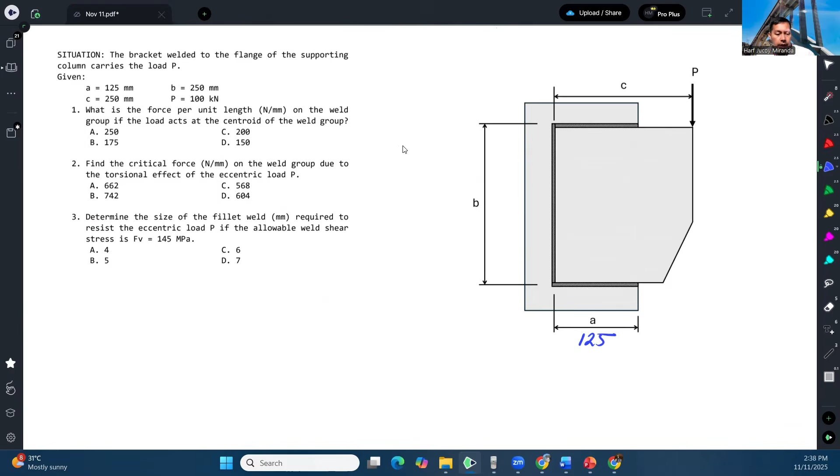We are given the following data. A is 125 mm. B is 250. C is also 250. And the applied P is 100 kilonewtons.

First question: what is the force per unit length on the weld group if the load acts at the centroid of the weld group? Second, find the critical force on the weld group due to the torsional effect of the eccentric load P. And lastly, number three, determine the size of the fillet weld required to resist the eccentric load P if the allowable weld shear stress is 145 megapascals.

So, una sa lahat, kung mapapansin natin, yung weld natin ito. Okay, first thing first, alam natin na itong weld na to, meron niyang certain centroid. Let's say, nandito banda yung centroid ng weld, no? Yung centroid. So ngayon, dahil yung P na to ay wala naman, hindi naman naka-apply dun sa weld group centroid, then this particular force will also create a torsional moment.

Okay? And the torsional moment can be defined by the eccentricity. So eccentricity natin guys, hindi ito no, hindi ito eccentricity. Ang eccentricity, balikan lang natin na sinusukat 'yon mula sa centroid ng weld group hanggang doon sa force. So, ito eccentricity. So para ma-define natin yan, kailangan muna natin alamin nasaan ba yung centroid na to?

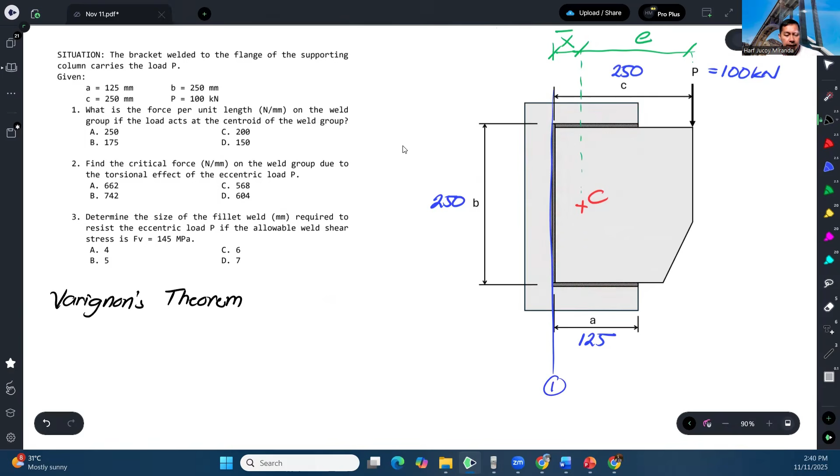No? So let me use this as my reference. No? So yung line 1 as my reference. So bali, we will take summation of moment length. No? Parang moment area pero length na lang kasi again, yung mga welds kasi parang ina-assume lang natin na mga lines yan. Hindi siya dahil sobrang nipis niya, no? So moment length. So about 1, no?

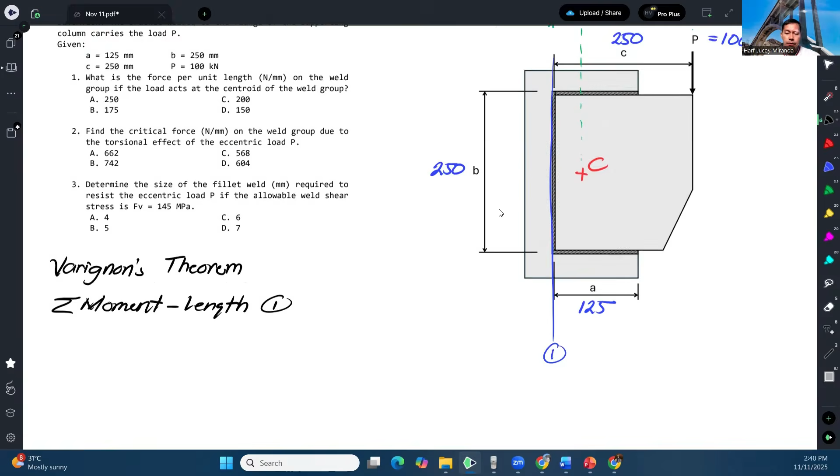So we have the total length times x bar should be equal to summation ng mga length times x. Okay, so ang total length natin will be siguro tawagin natin to na L1, L2, at saka L1 na rin kasi parehas lang naman sila ng length. No? Maliban na lang kung mas maiksi ito, pero same lang kasi. So L1 na lang tsaka L2.

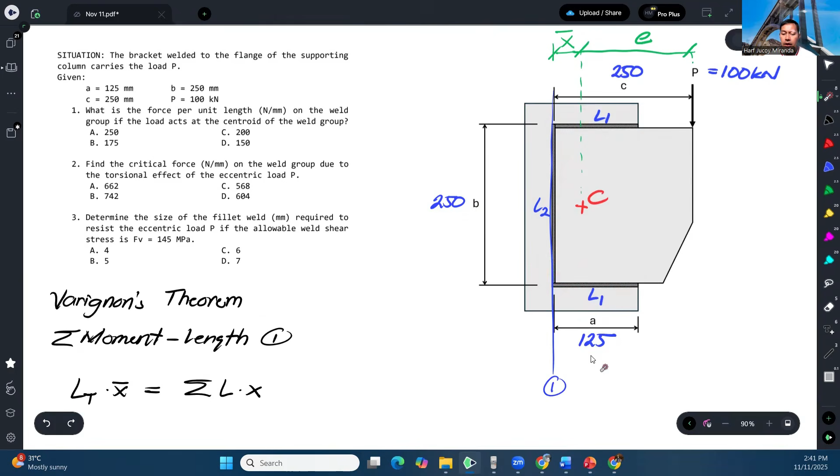So yung L1 natin is 125, no? Tapos yung L2 natin is 250. So dalawang 125. So we have, yung total length natin is dalawang 125 plus 250 times x bar. Tapos yung L1 natin ay 125, tapos nasaan yung centroid nung L1? So, di ba ang centroid ng line nasa gitna? Nandito sa gitna. So, dahil nasa gitna, edi kalahati ng 125. Okay? And then times 2 kasi dalawa sila.

Meron sa taas, meron sa ilalim. Plus, yung L2 naman. Yung L2 natin is 250. Okay? Tapos yung centroid nung 250 nandito. Di ba? Eh, di ba yan yung reference natin? So, ibig sabihin, yung moment arm nung L2 will be 0.

Okay? And that will give us our X bar. So, our X bar can now be calculated as 125 times 125 over 2 over 2 times 125. Ay, sorry. May times 2 pala to, no? Times 2. So, para mawawala lang yung over 2. So, 2 times 125 plus 250. So, dinivide ko na. Ito. So that will give us 31.25. So 31.25 millimeters. So ibig sabihin, ito ay nasa 31.25.

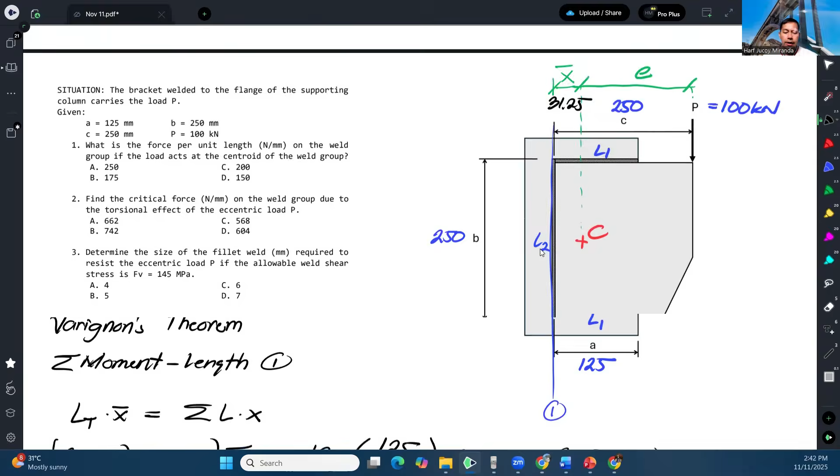Okay? So therefore, we can now compute for our eccentricity. So eccentricity natin is yung buong to, 250, ma-minus lang natin to. So that is 250 minus 31.25. And that gives us 218.75.

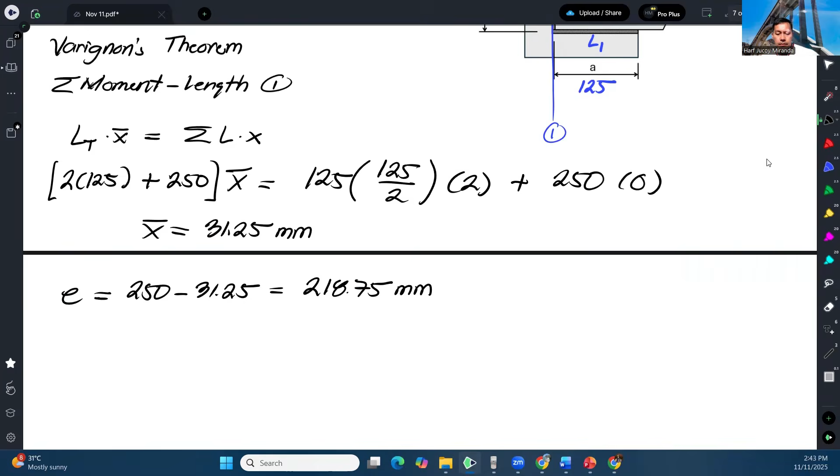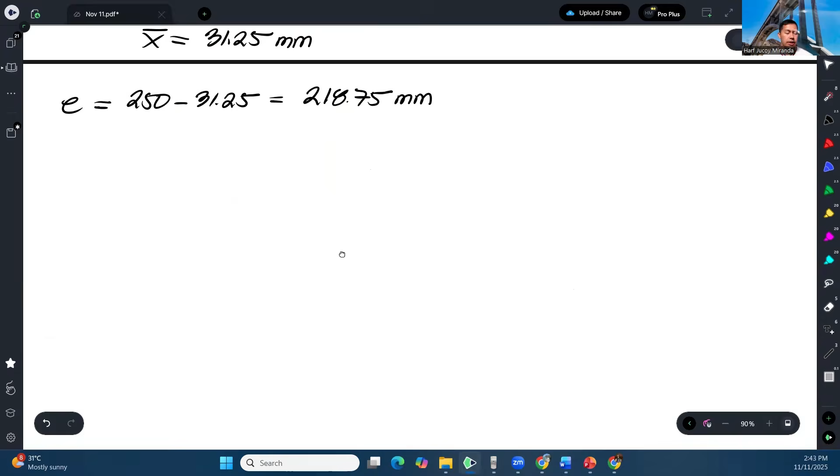Okay? So ngayon, kung i-analyze na natin yung mismong bracket, so kagaya dun sa eccentrically loaded bolted connection, ang mangyayari rin dito ay mahahati siya sa dalawang case or dalawang analysis. So kapag ito, nilipat natin dun sa centroid, no? Sa centroid, so ito nga yung mga welds will be subject to direct shear.

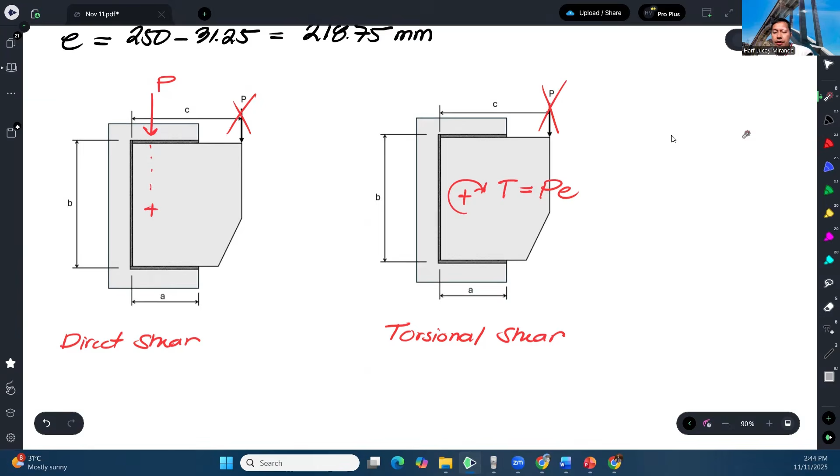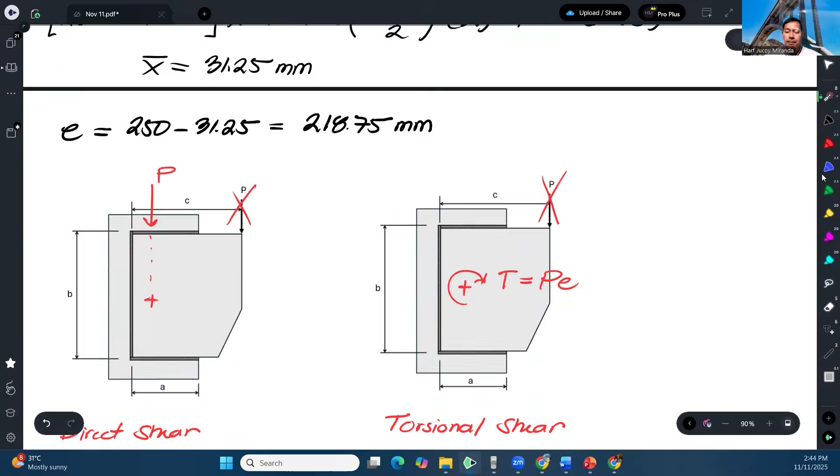Okay? And then, dahil nga ito ay originally merong eccentricity, meron ka ngayong torsional moment. So ngayon, meron ulit torsional shear. Okay? So where the torsional moment is P times E, ano? Ayan. Okay, so paano ba magre-react yung welds? So, ang pagre-react ng weld, kung mapapansin niyo sa tanong, naka-ano yan naka per mm. So, ibig sabihin, yung length, I mean yung force, will be distributed dun sa full length ng welds. So, bali ang magiging reaction dito, parang ganyan.

So yun yung reaction niya ng mga welds, nung weld. Okay, so tawagin ko tong reaction na to na Q shear. Okay? So yun yung reaction natin due to shear.

Tapos, dahil naman sa torsional moment, no? Kagaya sa bolts, kapag nag-drawing ka ng line papunta doon sa isa sa mga weld, yung magiging reaction niya, perpendicular dyan sa line na yan. Pag ganyan, yung reaction niya.

So meron siyang paikot na reaction. So yan naman yung reaction ng due to torsion.

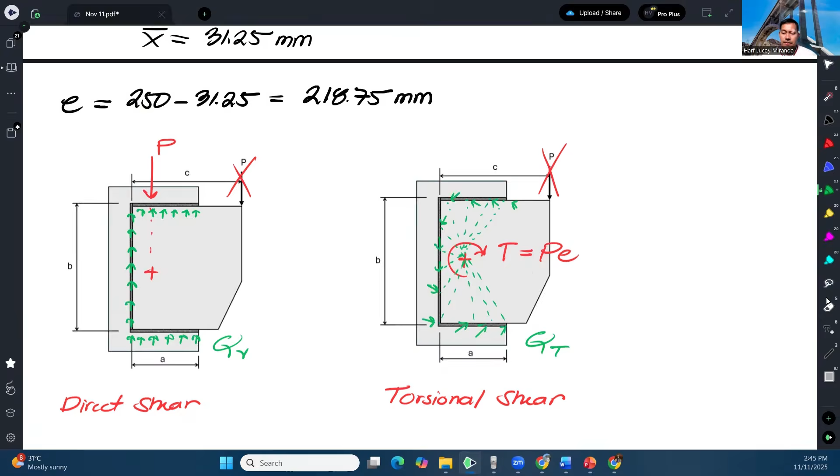Okay? So ang tanong sa una, what is the force per unit length on the weld due to the load if the load acts at the centroid of the weld group? So ibig sabihin, itong number one pertains to this. It pertains to this. Okay? So ibig sabihin, dito sa number one, ang tinutukoy niya, ano yung direct shear?

Okay? And how do we compute that? So to compute for QV, direct shear, that is just kung ano yung in-apply mo na load divided by total length lang nung weld. Kasi ang mangyayari lang, parang paghahatian ng buong weld na yan, yung force na to.

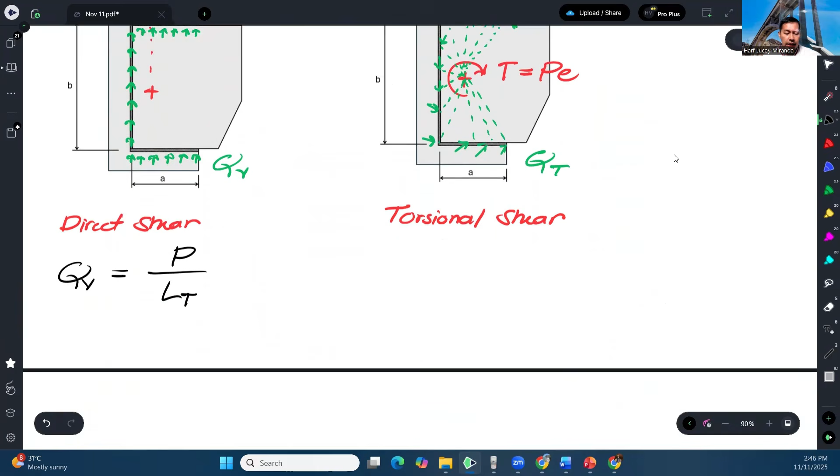Okay? So that means we will have 300. Gusto niya naka-Newton per mm eh. So gawin natin tong Newton. Tapos yung total length, di ba ito? 2 times 125 tapos plus 250.

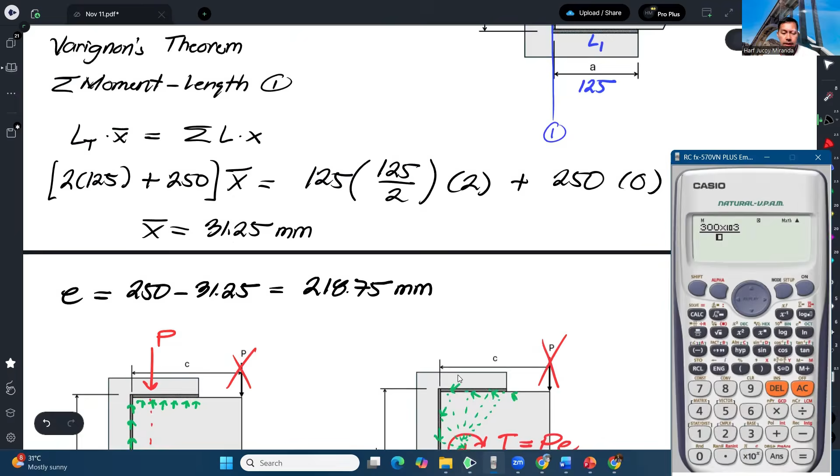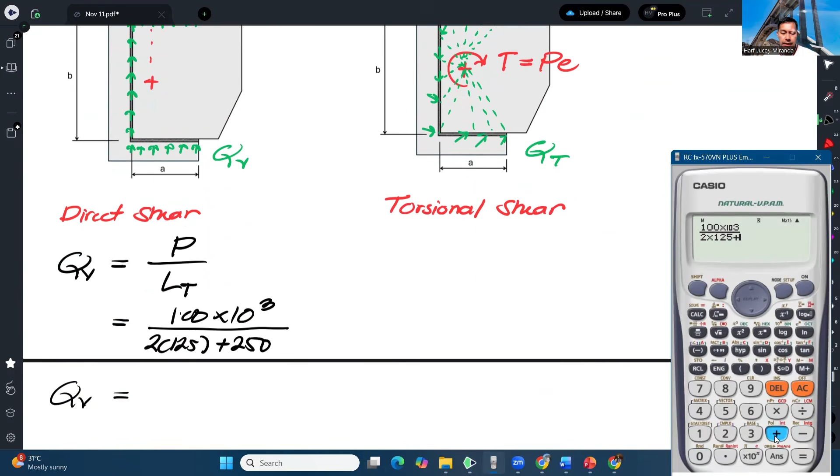Okay? So that will give us QV equals 300,000 over, what? 300 ba yun? Sorry, 100 lang pala, hindi 300. 100 lang pala yung P. 100. Ayan. So 100,000 over 2 times 125 plus 250. So that gives us 200 Newton per millimeter. So ito ngayon yung direct shear force acting on each weld.

Okay? So that is number one. Our answer is letter C. For number two, find the critical force.

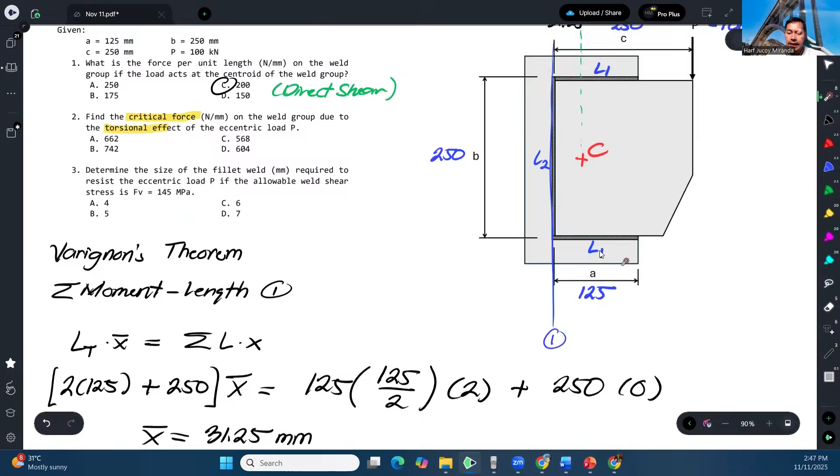So the term we use is critical, on the weld group due to the torsional effect. So dito naman tayo mag-analyze. Ito naman. Okay? So dahil sinabi niya critical, ibig sabihin, kailangan nating malaman nasaan dyan yung critical weld. Kasi, ang idea, guys, iba-ibang location ng weld, iba-iba rin yung reaction niyan.

Okay? Bakit? Kasi di ba ang formula para makuha natin yung torsional shear is T rho over J. So actually yung rho, okay, yung torsional shear nakadepende sa rho. Ibig sabihin ng rho, yung direct distance. Yan, rho yan, no? So actually kapag maliit yung rho, maliit yung shear. So masasabi ko na yung shear dito maliit kasi malapit siya.

So ibig sabihin, yung critical shear for torsion is actually yung pinakamalayo, no? And obvious naman dito na ang pinakamalayo would be this corner o di kaya ito, no? Whichever you will choose. Pwedeng ito, pwedeng ito. Okay? So farthest, no? So that will be the most critical. So ibig sabihin, ito yun.

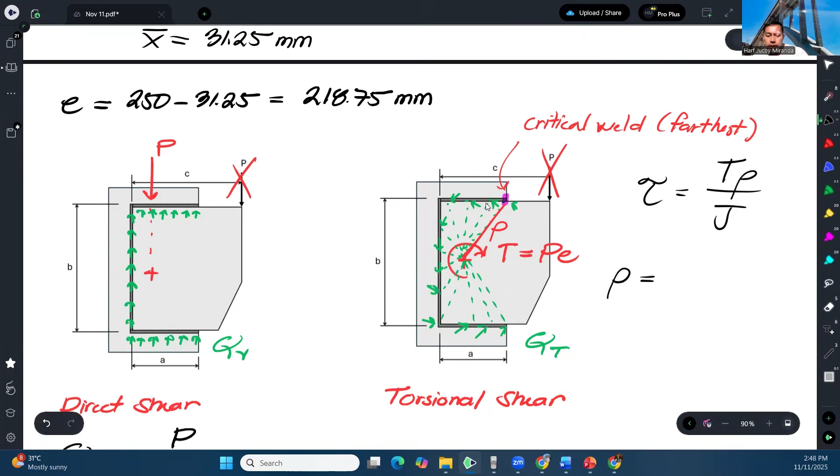Okay? So yan yung i-analyze natin. Para makuha yung rho niyan, ito yung rho niya. So para makuha yung rho, kailangan ko lang itong distance na to. Yan. And actually ito, alam naman natin na 250 ito. So kalahati na lang yun ng 250, which is 250 over 2.

Tapos ito naman, itong distance na to, actually yan. Kasi nakuha na natin itong distance na to na X bar. Di ba yun yung 31.25. Okay? So itong kabila, since ang A natin is 125, so ibig sabihin ito ay 125 minus 31.25.

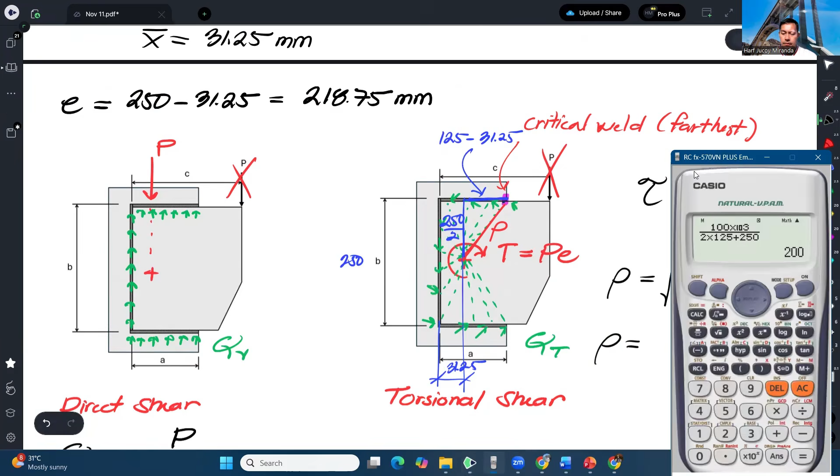Okay, so ibig sabihin yung rho natin ay square root ng, okay, square root ng 250 over 2 squared plus 125 minus 31.25 squared. So our rho would be square root of, okay, so that will be our rho, 156.25.

Okay, tapos yung torsion natin, sabi natin P times E, di ba? So 100, tapos yung E natin is ito. Okay, 218, so 0.21875 para maging kilonewton meter. So that's 21.875.

Okay, so ang wala na lang dyan yung J. Ito na lang, yung polar moment of inertia. So para makuha yung polar moment of inertia,

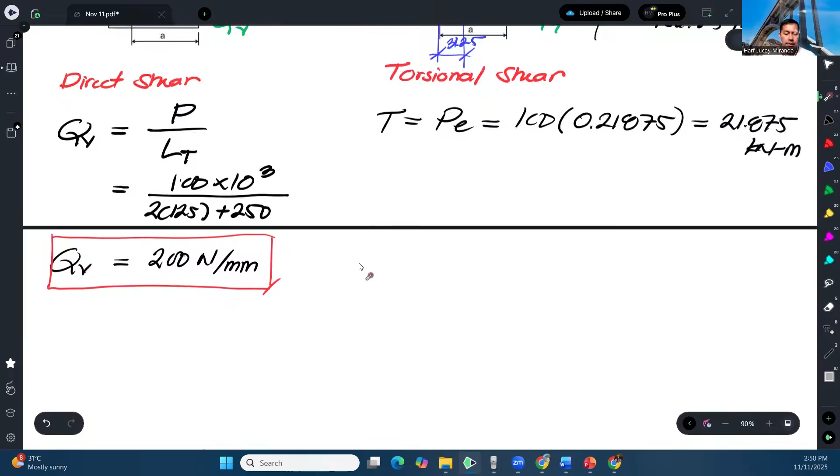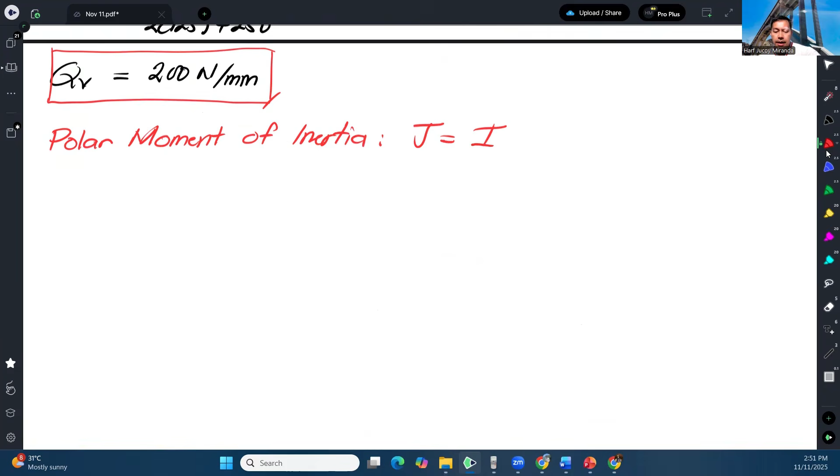Okay, so recall na ang polar moment of inertia can be calculated by adding up Ix and Iy. Yung moment of inertia about X and moment of inertia about Y. And then to calculate the moment of inertia about X, di ba ginagawa lang natin summation ng centroidal moment of inertia plus A D squared. So yun din natin kapag X, moment of inertia about X, yung distances natin is Y. Di ba? And then kapag naman moment of inertia mo ay Y, summation ng centroidal moment of inertia plus A, yung D mo naman is magiging X.

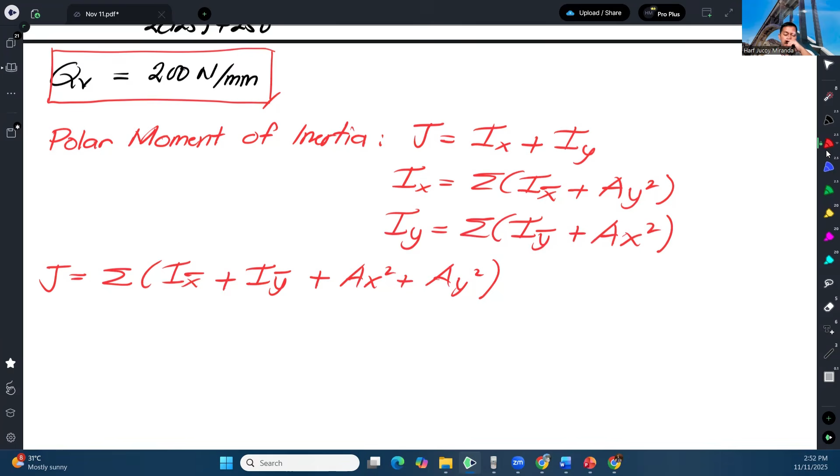So ganyan. Okay? So ibig sabihin, yung computation natin ng polar moment of inertia, masasabi natin na summation na lang ng Ix centroidal plus Iy centroidal plus Ax squared plus Ay squared. So ganyan. Okay? Ngayon, paano kung weld ang pinag-uusapan?

So kapag weld ang pinag-uusapan, let's say meron kang weld dito, tapos meron ka ring weld dito. Ayan. So di ba ang una mong gagawin, hahanapin mo yung centroid. So let's say ito yung centroid. Nandiyan kunwari yung centroid ng mga weld. Tapos kunwari, ang weld na to may haba na L1, may haba na L2.

Okay, so to get the moment of inertia, we will be assuming 1 millimeter thickness. So the moment of inertia of this weld, the Ix, centroidal, is BH cube. So your B is L2, your H is 1 cube over 12.

Then the centroidal moment of inertia about the y-axis. Okay, for y, this is the axis. So what's cubed now is this one. So we have 1, L2 cube over 12.

Then the A x squared will be equal to the area, which is L2 times 1. Then the x is where the centroid is going to, this is x, call it x2, so x2 squared. And then the A y squared, the area is also L2 times 1, and the y we're talking about from here to here is y2, so y2 squared.

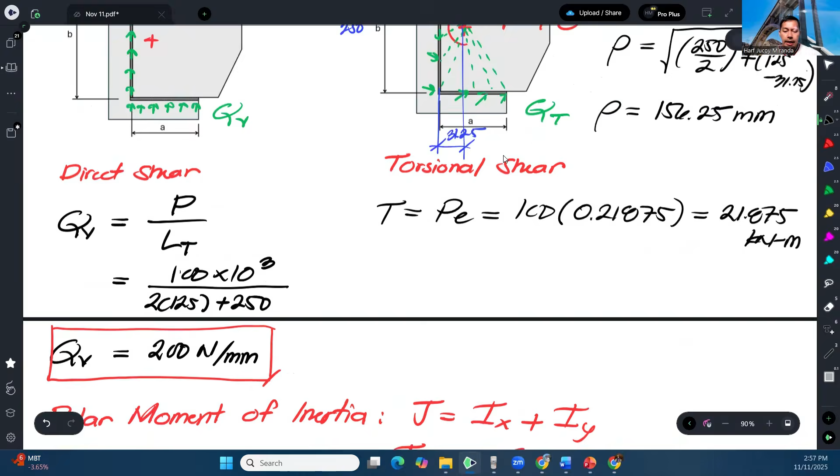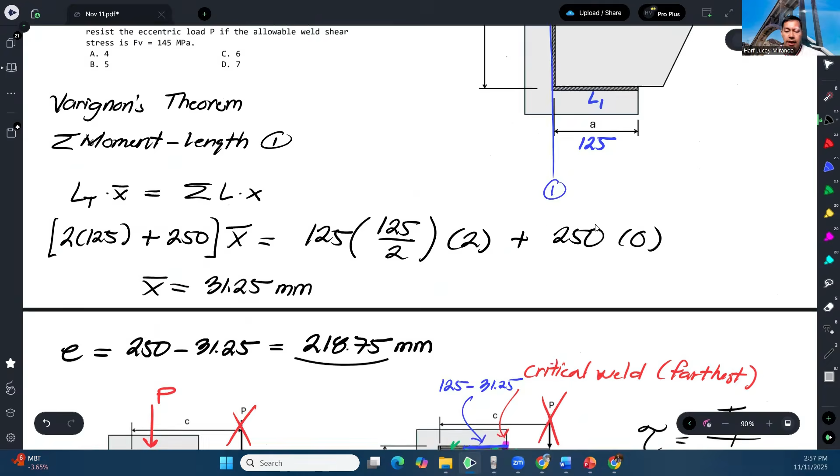So we will have L1 first. L1 is this one, 125. So 125 times 125 squared over 12 plus the X, or the location of the centroid of L1 — this is the centroid, here. So the x is this.

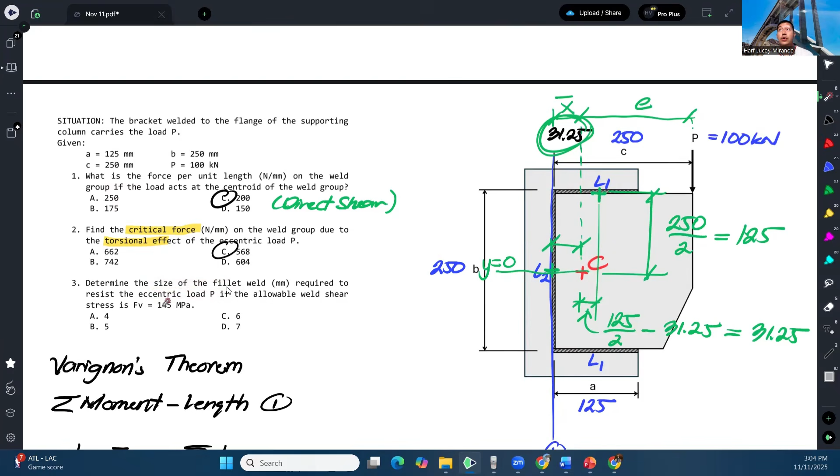Alright, now in the last question, determine the size of the fillet weld required to resist the eccentric load P if the allowable weld shear stress is 145 megapascal. So, ngayon pinapadesign na yung size. Para ma-design natin, kailangan natin ngayon malaman at ma-identify yung most critical weld. Nabanggit ko na nga na kapag sa torsion, ang pinag-uusapan natin na most critical is yung farthest from the centroid. Yung pangalawang criteria, kagaya sa bolt, dapat yun din ay nearest sa line of action ng force. So, ito nga yun, 'di ba?

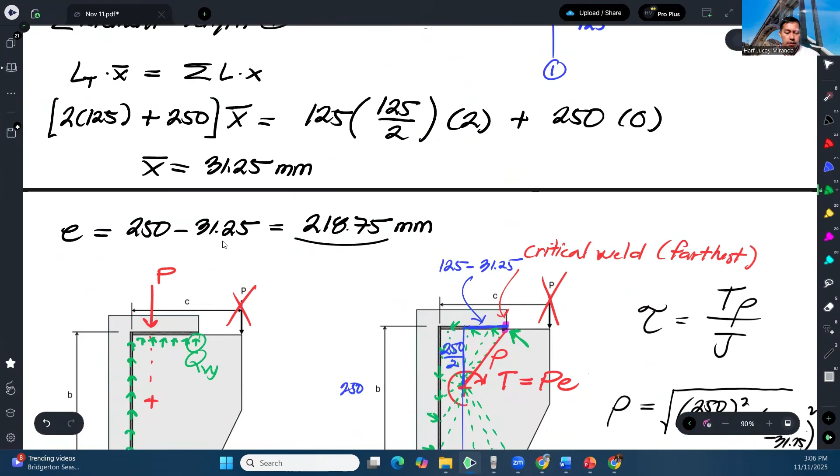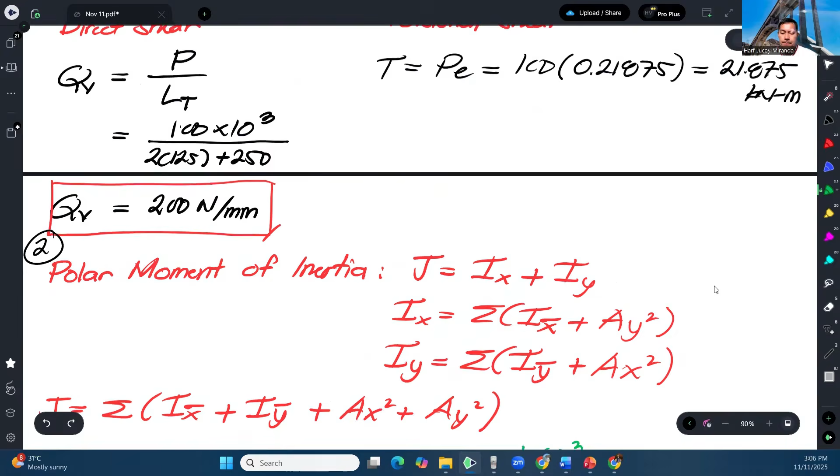Hindi yan. So, 125 minus 31.25. Actually, yung eccentricity, no? 93.75. Okay, so yan yung layo niya, no? So, dahil doon, ito kasi yung ito yung line papunta diyan.

So, yung force natin papunta dito, perpendicular. So, dahil perpendicular, yung magiging slope nito ay negative reciprocal lang ng slope nito. Ano ba slope nito? So, you can just use yung 93.75 tapos yung rise mo 125. Tapos yung distance na yan, magiging 156.25. Okay? So dahil ang slope nito, ang run mo 93.75, ang rise mo 125. So dito magbabaliktad lang. Ang magiging run mo ay magiging rise mo 93.75. Ang magiging run mo 125. Tapos yung hypotenuse mo 156.25 pa din.

Okay? Kaya ibig sabihin, itong QTY is just QT times, ano siya, Y component, no? So 93.75 over 156.25. Tapos yung QTX natin is just QT times X component. So 125 over 156.25. So pwedeng ganyan.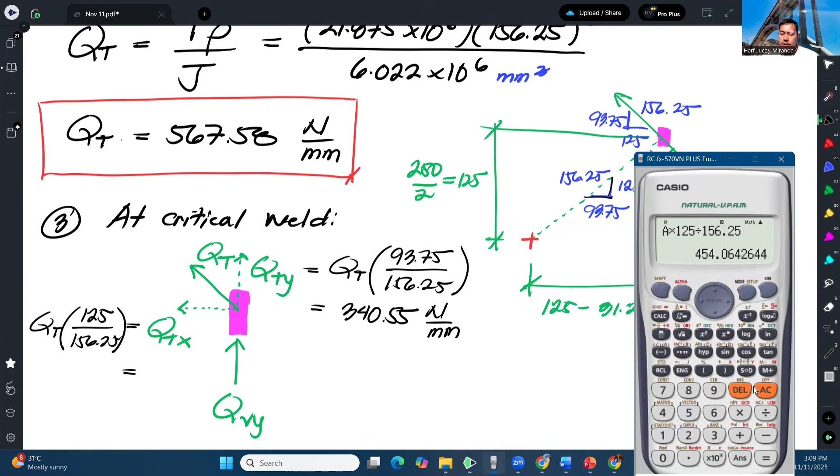Ito naman yung X component. So 454.06. Okay? So yan, no? Yan yung X and Y component. Okay? And then ito, alam naman natin ito, na-compute natin ito kanina. Ano nga yan? Sa number 1, 200. So ito ay 200 Newton per mm.

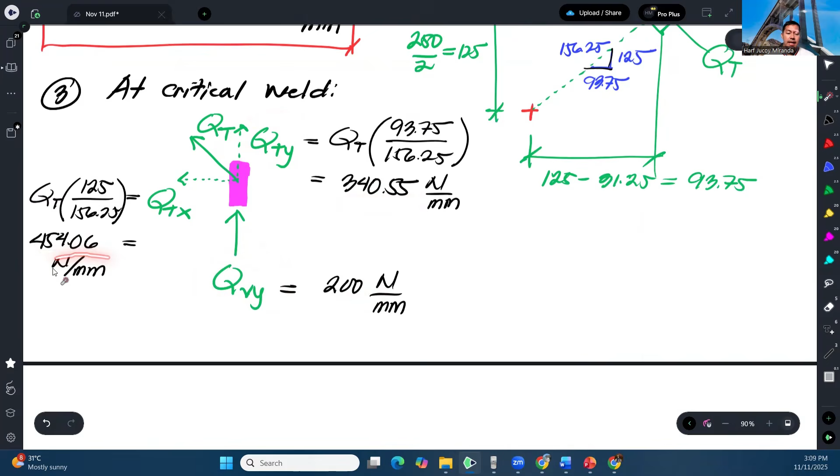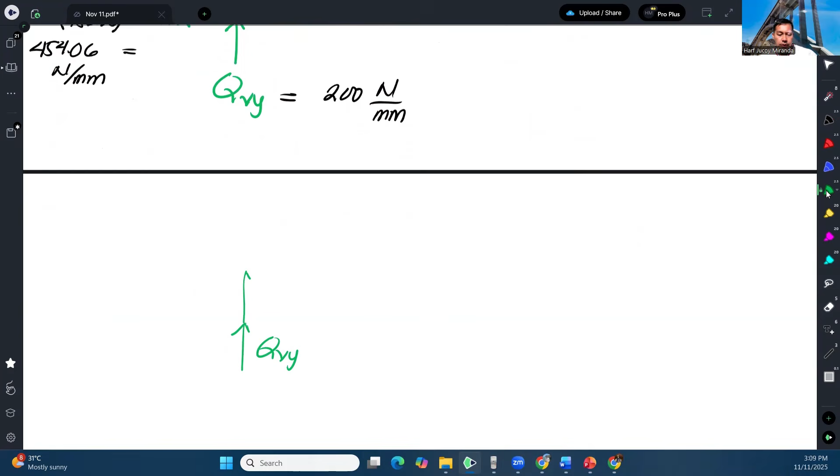Okay? So basically, i-combine lang natin lahat yan, kagaya ng ginagawa natin sa bolt. Bali, ito, at saka ito, magko-combine. Tapos ito naman, wala siyang ka-partner. Kaya yan na yun, as is na yan. So after that, we will get the resultant. Okay? Kaya magiging resultant niya parang ganito, no? Meron kang QVY, parang ganito yung mangyayari. Ito yung QVY mo, ito yung QTY mo, tapos ito yung QTX. Tapos ito yung resultant ng weld reaction.

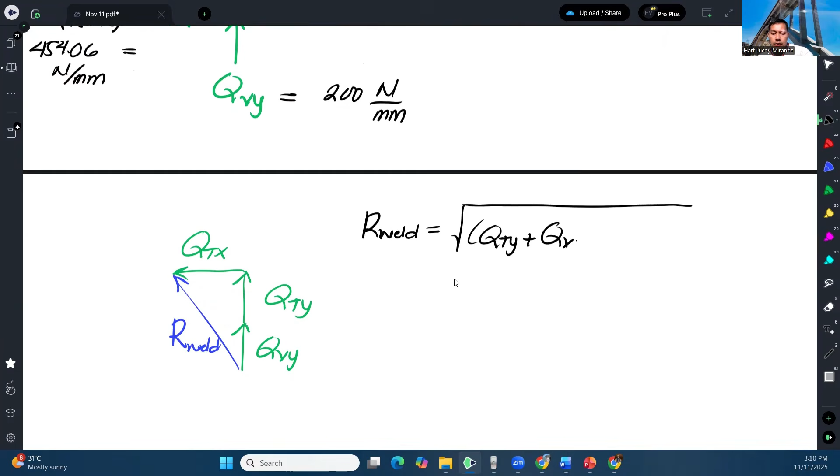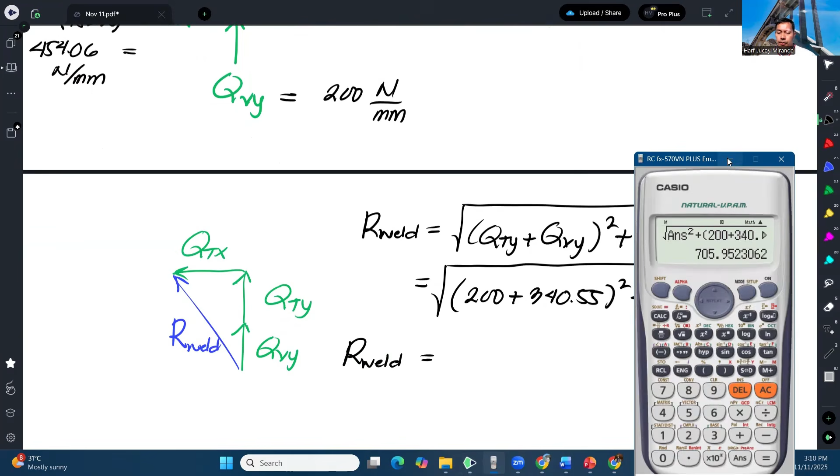Okay? So anyway, that is square root of QTY plus QVY squared plus QTX squared. So we have 200 plus 340.55 squared plus 454.06 squared. So the reaction of the most critical weld would be, okay, so 705.95. 705.95 mm. Okay? So that is the reaction of the weld.

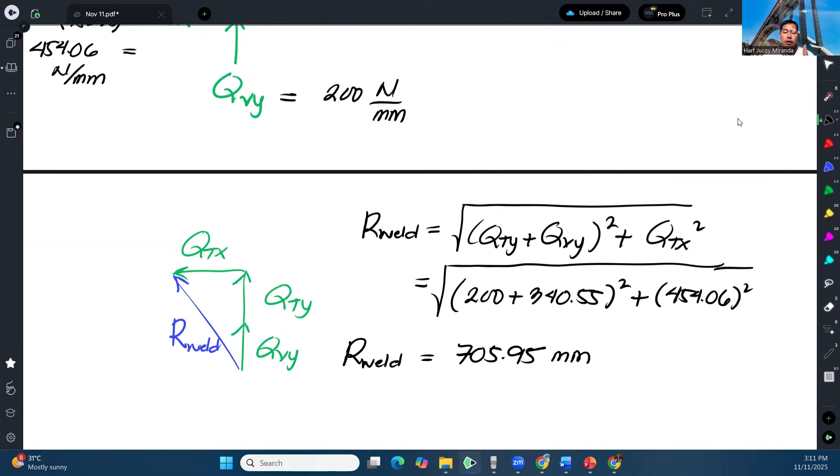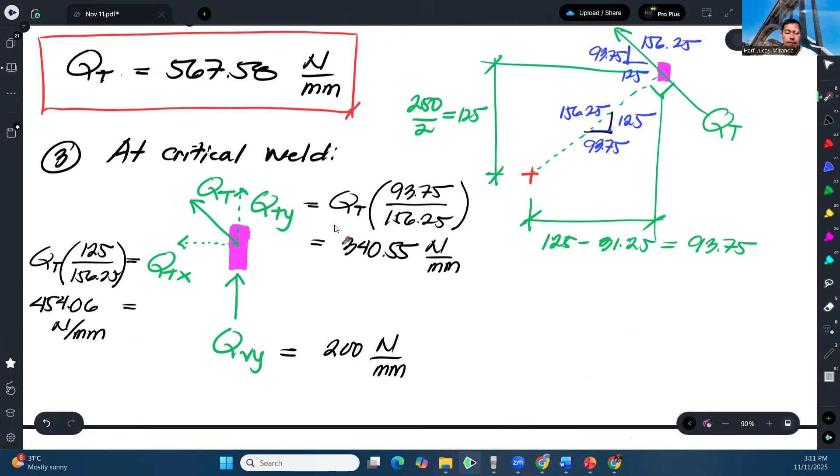So bago ako mag-proceed, sir, meron bang way na makuha ko kaagad itong component without solving na lang yung QT? Meron. Actually, di ba, paano ba natin kinompute yung QT? Di ba kinompute natin yung QT using this T rho over J.

So pag ako computein mo yung QTX, di ba, yung QT, mumultiply mo dito. Ano ba to? So di ba, ito, lumalabas siya yung X. X yan. Tapos ito, Y. Okay? So, nung kino-compute natin yung QTX, ito pala yung QTX, guys. Ang multiply natin is 125, which is yun yung Y. So, ibig sabihin, para nangyari lang, nag-multiply lang tayo dito ng Y over, di ba yung divisor na to, ito yung rho. So, magka-cancel lang to. Kaya yung QTX natin can be calculated as TY over J.

And likewise, kapag kukumpitin natin directly yung QTY. So, ganun din. T rho over J multiplied by yung slope. Ang slope natin, di ba, na pinang-multiply ito. Ano ba to? Di ba yan yung X? So, X over rho. Ito yung rho. Kaya magka-cancel din ito. Kaya, ang shortcut, TX over J. So, kagaya sa bolts, di ba, meron akong tinuro sa bolts na kapag kukumitin mo yung component na to directly, yung T rho over J, yung rho mong nagagamitin is X. Kapag Y. Kapag X naman, Y naman yung ibang multiply mo na distance. So, yun yung shortcut. Pakita ko lang.

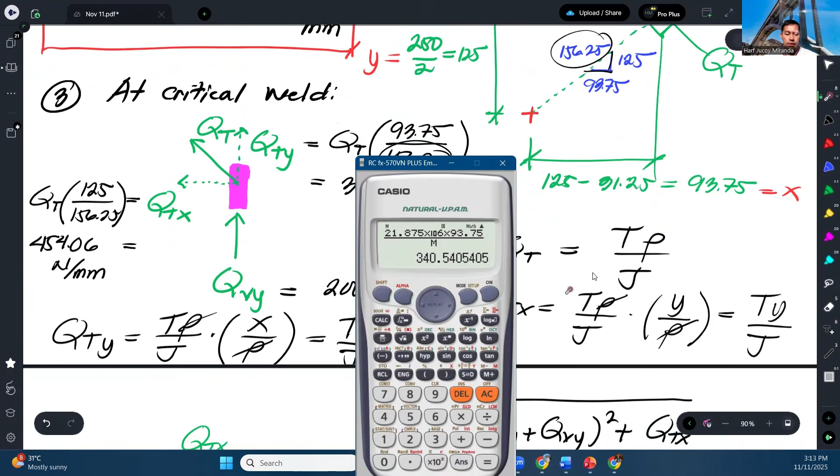Kung halimbawa, kung gusto mong kunin yung QTY o di T, ano yung T? 21.875 million times X. Ano ba yung X? Ito yung X. 93.75 over J. Yung J nilagay ko sa M. So kung titignan mo dito, ito yun. Ito yung 340, QTY. Okay? Para naman sa QTX, gawin mo lang tong Y. Ano ba yung Y natin? 125. Adi, gawin mo lang tong 125. Ayan. 454.05. May konting discrepancy na kasi nag-round off na tayo dyan.

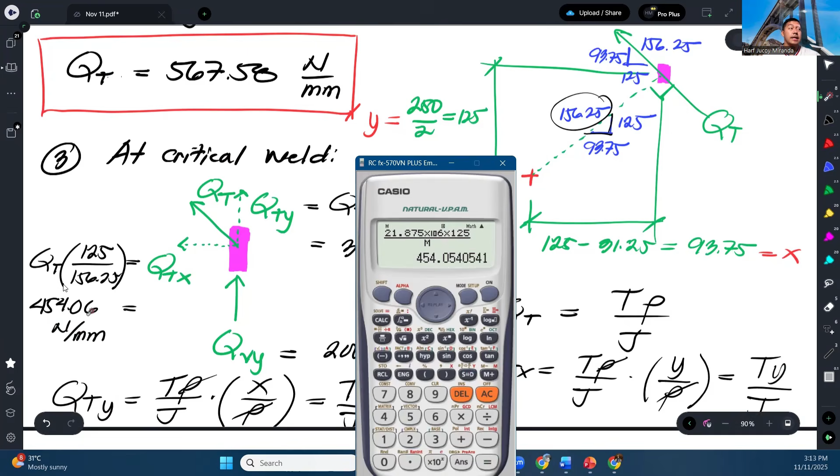Okay? So that's direct way of finding the components. Kagaya lang sa bolts. Okay? Anyway, now that we have the reaction, actually hindi ito mm. This is Newton per mm. Ayan. So now that we have the reaction of the most critical weld, then we can now design.

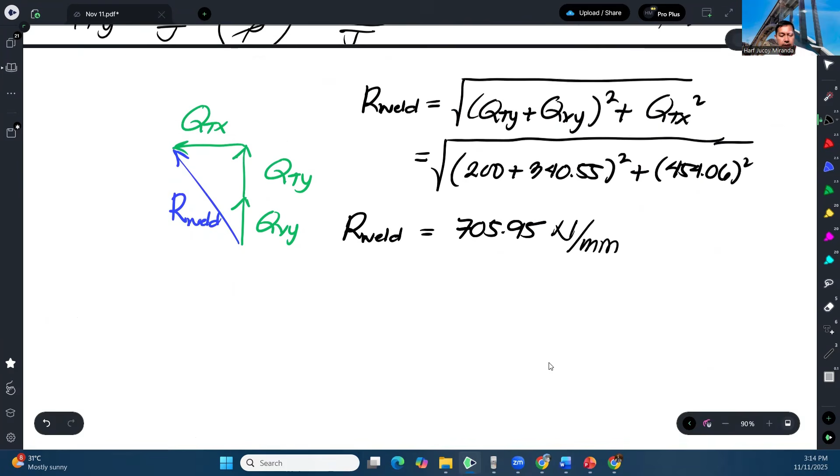Okay, so ano nga ba ang shear stress ng weld, no? So sa welds, ang idea kasi ng weld, parang ganito siya eh. Parang meron kang member dito, meron kang member na gusto mong idikit sa member na to. Ganyan. Diba? Parang gusto mo to silang pagsamahin. So para mapagsama mo, maglalagay ka ngayon ng weld dito. Maglalagay ka ng weld dyan.

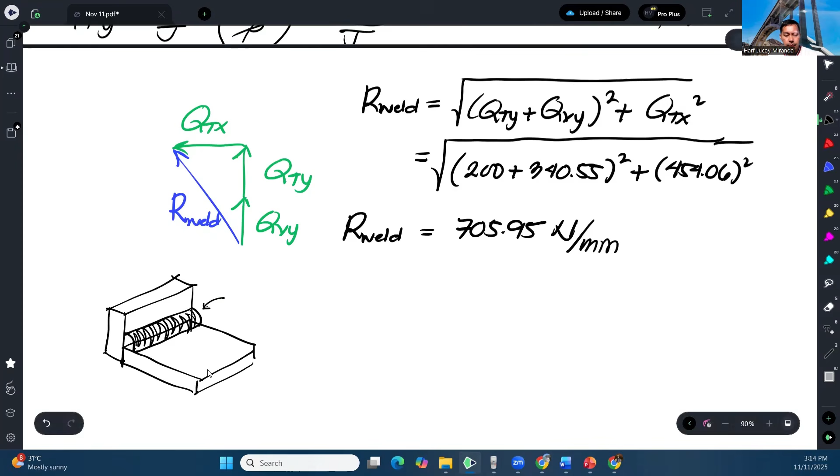Yan yung weld natin, diba? Ganyan yung idea niyan. So ngayon, yung cross-section ng weld, meron siyang thickness. Yung cross-section ng weld na to, nakikita natin, ganito yan. Approximately ganyan yan, yung cross-section niya.

Okay, so kapag pinag-usapan ay fillet weld, sinasabi mo, ano yung thickness? Ito yung thickness, yung legs, yun yung thickness. Kaya lang, kapag nag-apply ka ng force dun sa weld, halimbawa, nag-apply ka ng force papunta dito,

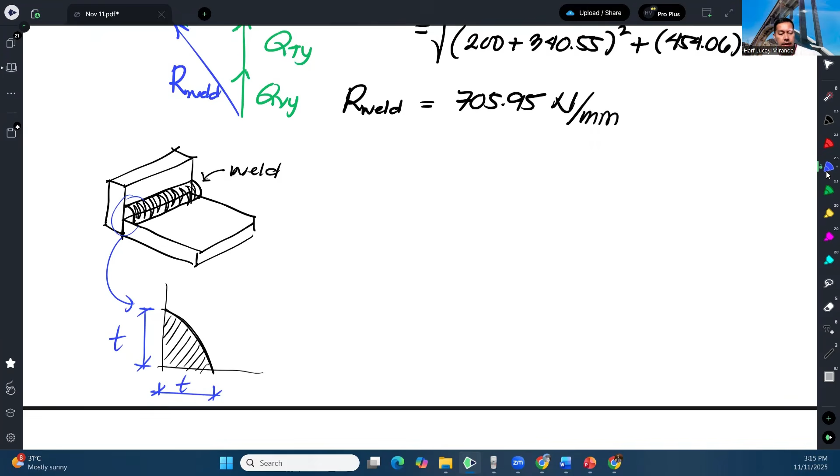tapos papunta doon. So, syempre, yung weld na yan will be subject to shearing. Yung sheared area niya, bali ito. So, dyan daw yung mangyayari yung shearing. Shearing plane. Naka-incline yung shearing plane, diba? So bali ito yan.

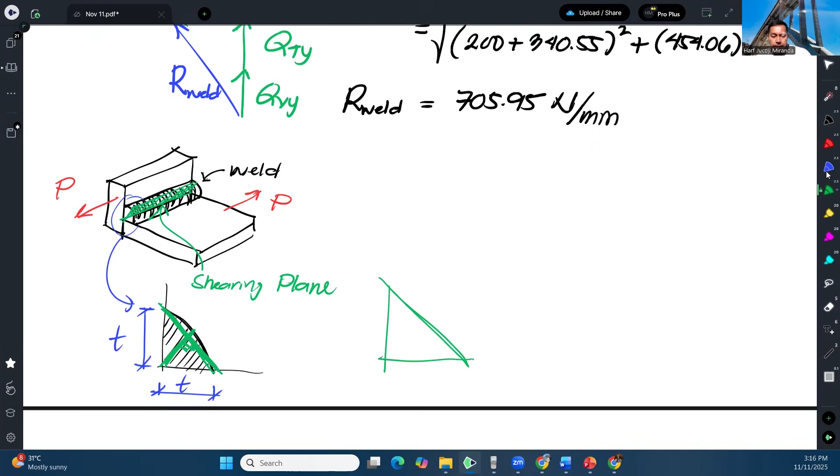Okay, so yung naka-incline na yon is actually assumed to be perpendicular dito. Ina-assume na lang na itong part na to is straight line. Ibig sabihin, meron kang parang right triangle. Dahil ito ay perpendicular dyan, parang lumalabas ngayon na parang ganito siya, ang geometry niya. So, ito yung thickness, tapos ito, tatawagin kong A, yan ngayon yung length, tinatawag na length of throat. And to define that, because this is 90, tapos as you can see, ano rin tong triangle na to eh. 90 rin to.

So dahil ito ay equal leg, ibig sabihin ito ay 45 degrees. So ngayon, kung kukunin ko tong triangle naman na to, kung i-analyze mo yung triangle na yan, lumalabas sa triangle na yan, ito yung hypotenuse. Ito ay 45 degrees, kasi ito yung length of throat. Ibig sabihin, yung length of throat is opposite ng 45, tapos yung T yung hypotenuse. Kaya yung relationship nila will be using sine function. Sine of 45 is equal to opposite over hypotenuse. Kaya lumalabas yung length of throat ay equal sa sine 45 times thickness. Tapos kapag kinumpit mo yung sine 45, ang value niyan 0.707. Kaya sa mga design sa NSCP, meron 0.707 times T. Yun yung length of throat.

Okay, kaya ang magiging area ng shearing plane, yung area niyan ay equal sa length of throat times kung gaano man to kahaba. Kung gaano man yan kahaba, tawagin nating L, yung haba ng weld. So, A times L. Kaya ngayon, lumalabas yung area ay 0.707 thickness times L. So, yun yung area ng weld, shearing area ng weld.

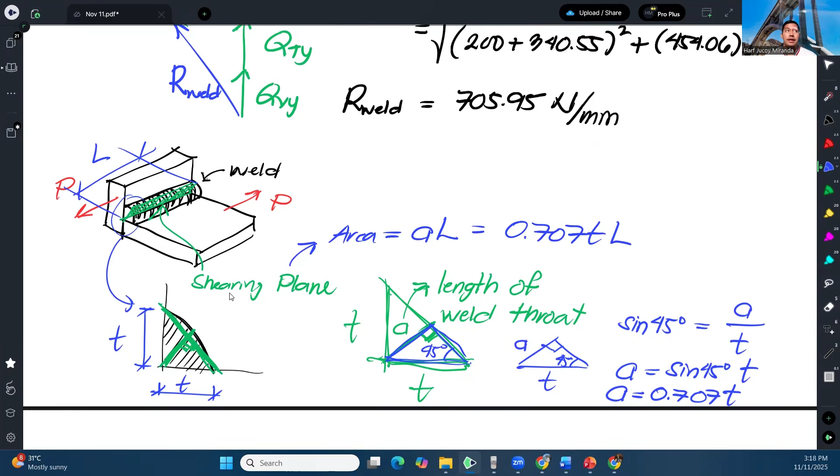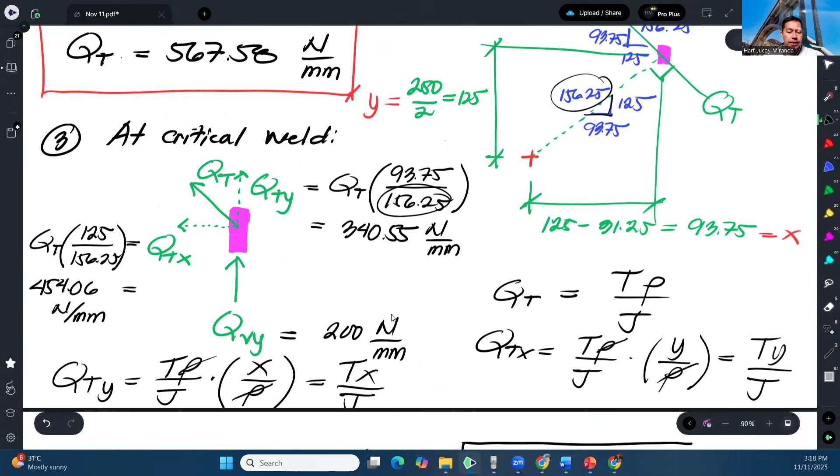Okay, kaya ngayon, kapag may stress yung weld, magiging stress sa weld ay equal sa force divided by yung area ng weld. So, ang area mo ay 0.707 thickness times L. Alright, so ganyan siya. Okay, so ngayon, sa case natin, dapat daw hindi ito lalagpas dun sa allowable weld shear stress. So, ang allowable weld shear stress na binigay ay 145 megapascals. Okay, dapat hindi siya lalagpas.

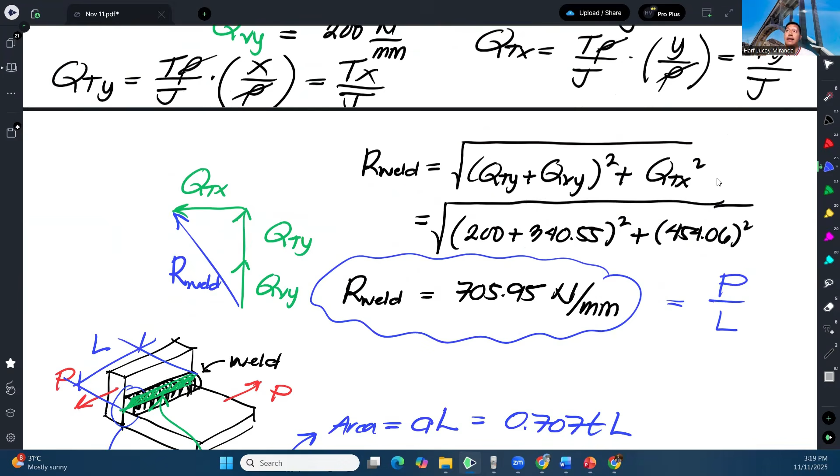So ngayon, ano ba tinatanong? Ang tinatanong, ano na yung required thickness? I-design natin yung required thickness. Pangalawa na kailangan natin maintindihan is yung nakuha natin na reaction na to, dahil sa units siya na Newton per mm, actually na yung force per unit length. Bali ito na yan, yan na yung reaction ng weld.

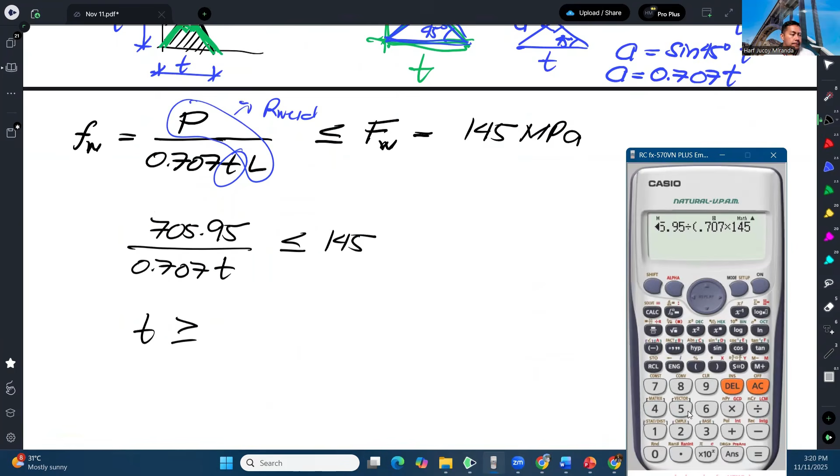Okay, so therefore, ito na yan, ilalagay ko na dito. So, 705.95 divided by 0.707 times thickness should not exceed 145. So, ibig sabihin, yung thickness natin should be at least 705.95 over 0.707 times 145. Okay, and that gives us 6.89 mm.

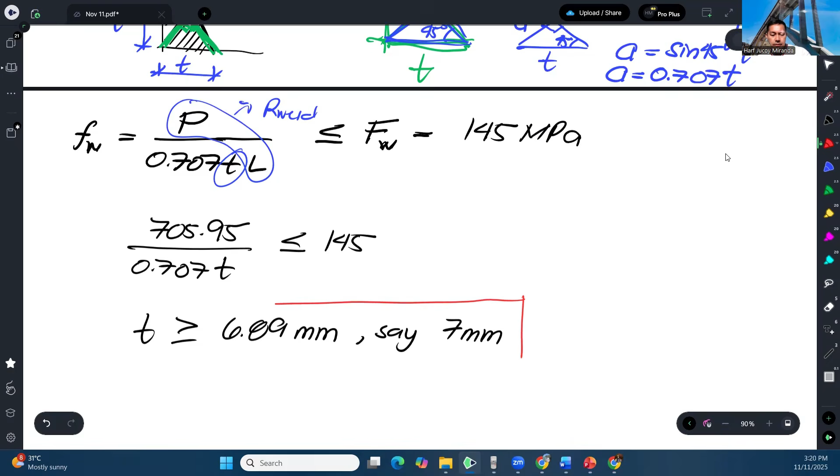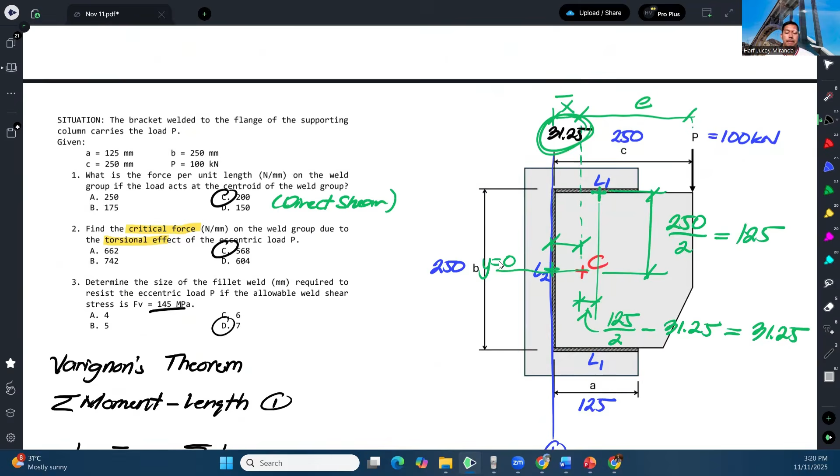Okay, so therefore, we will choose 7 mm. So here, our answer would be letter D. So kailangan yung thickness nung or yung size ng fillet weld ay hindi pwedeng bumaba ng 6.89 mm. So ibig sabihin, we will choose the next higher, 7 mm. Okay, that's how we analyze welds.

So, just a recap, sir, bakit yung analysis natin naka per mm? Kasi nga po, kapag weld, kailangan nating malaman kung saan dito sa lahat ng weld na to yung pinaka-critical. So, parang ang ginawa natin, kumuha lang tayo ng 1 mm na thick na length nung particular portion na yun. So, yun lang yung inanalyze natin. Sir, bakit yun lang? Kasi nga, yun yung critical. Ibig sabihin, wala nang mas lalaki pa sa stress na nararanasan nito dun sa buong weld. So dito, may stress dyan, pero maliit, mas maliit kumpara dito. Kaya dahil ito yung may pinaka-nai-stress, siya yung magkocontrol ngayon nung capacity nung weld group. Kaya siya lang yung ginamit natin for our analysis.

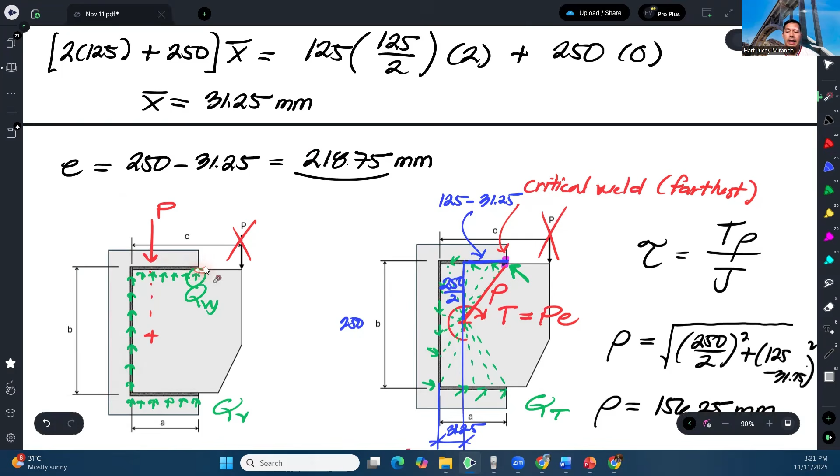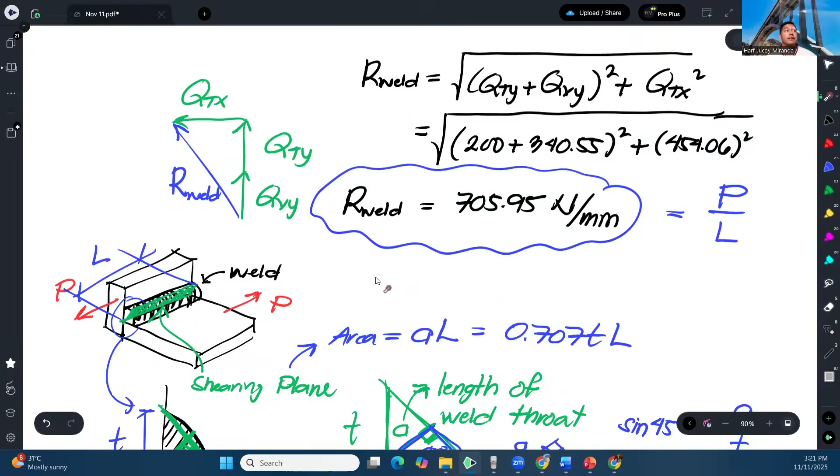Okay, so the analysis is just similar to eccentrically loaded bolted connection. And that's how we solve this problem.